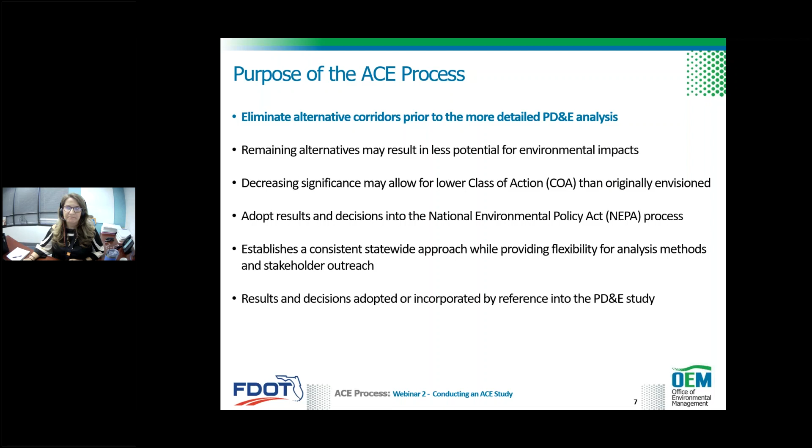So here's a graphic we presented in webinar 1, and we're going to go into a lot more detail into each of these steps. If you recall from a high-level perspective, the ACE process generally follows 3 main components: the initial analysis, conducting the actual ACE study, and documenting in the ACER.

So in webinar 1, we highlighted the different scenarios, and really the difference depends on how much information you have. In scenario 1, you have no information, and you might be using the ACE process to develop the study area and refine it. In scenario 2, you probably have information on your study area and you're using the process to identify and refine your corridors. And finally, in scenario 3, that's when you have the most information. You might have conducted a feasibility study, already have initial corridors identified, and use it to refine the corridors as well as eliminate.

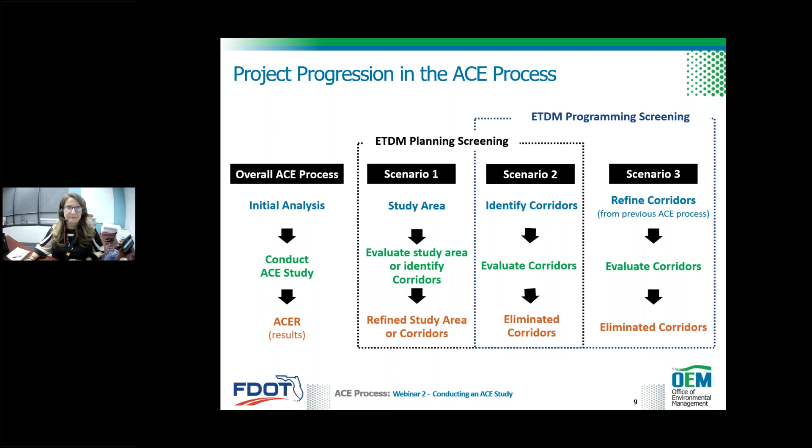Let's get into the initial steps before conducting the ACE study. At this point, you should know that you're going to conduct an ACE study. Before starting, you'll perform initial analysis to either define the study area or identify corridors which will be evaluated during the ACE study. You'll notice there's a lot of flexibility in the ACE process to use a best fit approach based on where you are in the process and what you know at the time.

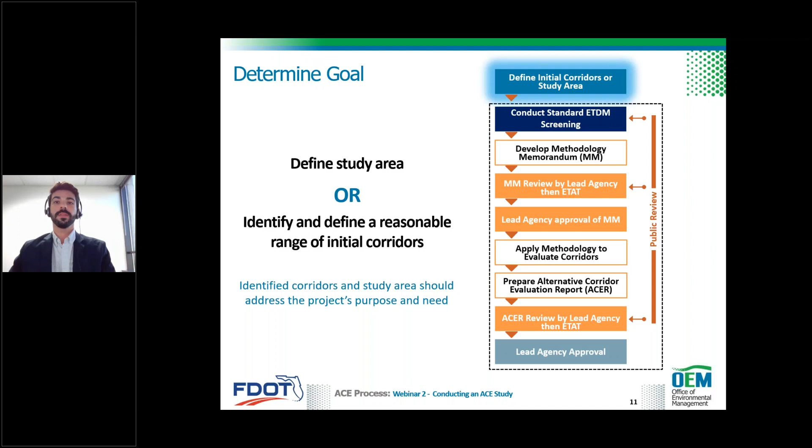I'm going to walk you through the key steps for this initial analysis. The very first step is figuring out whether you want to define the study area or identify corridors that address purpose and need. The next few slides provide guidance to help you select the approach for the initial analysis. Should we select a study area or should we get into identifying corridors?

You'll want to define a study area when you're conducting an ETDM planning screen and there's limited information on the project—perhaps the only information you have is from the MPO's long-range transportation plan. Another reason is it's a large study area, which has potential to be broken up into sub-areas for analysis. The West Bay Parkway project, listed at the bottom of your screen, included a study area analysis which assisted in refining the study area and identifying corridors for the ACE study.

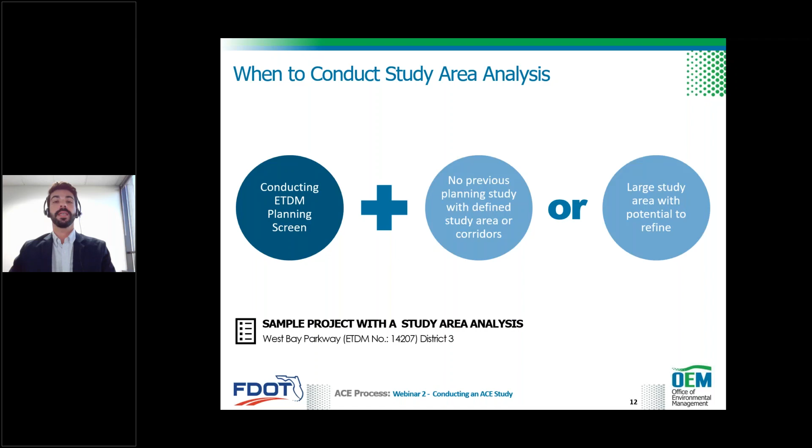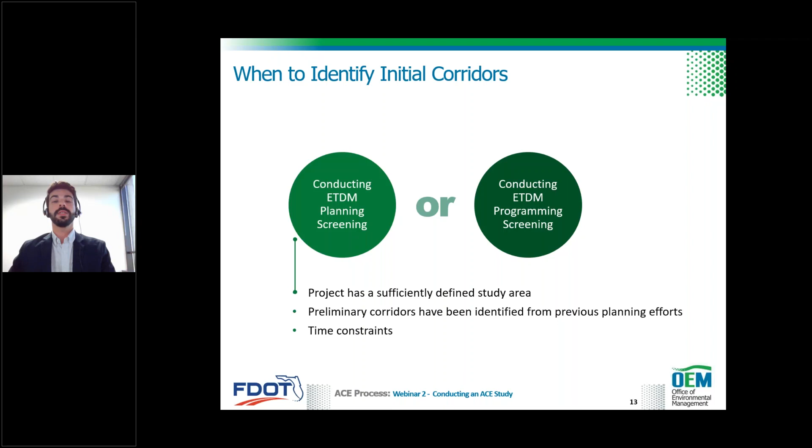You can also jump straight into identifying corridors during the ETDM planning screen stage. This could be an approach if the study area seems appropriate, or perhaps you already have preliminary corridors from a planning study or a master plan. And of course, if there's time constraints, whether from local governments or legislative mandates, then perhaps it makes sense to start identifying corridors. So technically, you have the option during the ETDM planning screen stage. However, during the ETDM programming screen, you need to begin identifying corridors for the ACE study.

Now that we've figured out what outcome we want from this initial analysis, let's dig in. Just like any project, you gather information. Some of this should have already been gathered when deciding to select an approach for the initial analysis. You use this information to begin defining some of the project parameters. As a starting point, there should be something from the MPO's long-range transportation plan or the strategic intermodal systems plan. If there's a planning study, that should also be considered.

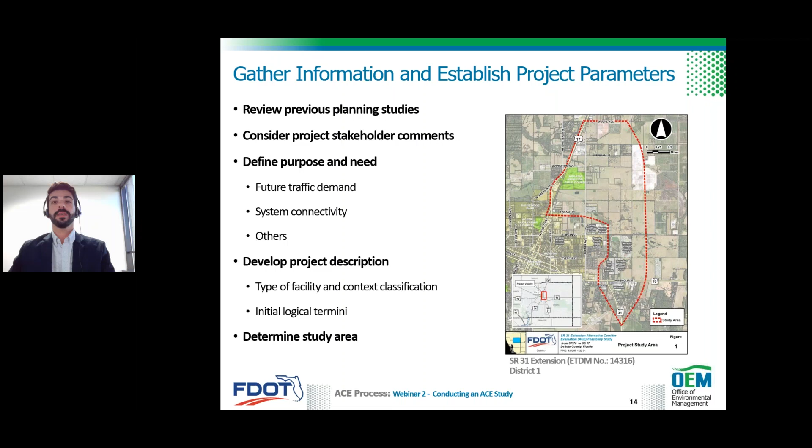So what's the purpose and need of the project? You need to describe this before defining the study area or identifying corridors. Is the purpose of the project to relieve traffic demand from a local community? Do you want to connect interstate systems and arterial roadways? What is the project—is it an expressway, an arterial, a bicycle and pedestrian corridor? Is it in an urban setting, a rural community, a natural area? And where will the project connect? Do you have a begin and end point?

If the intent is to identify corridors from the initial analysis, you first need to determine what type of corridor path or analysis. Swaths are the largest types of corridor paths—this is where a lot of ACE studies start out. Broad corridors are more defined; you'll have a clear idea of the typical section but keep it a little wider for future refinements. A narrower alignment is when you have a defined typical section—this could be the result from the ACE study and what you would want to take into the PD&E phase.

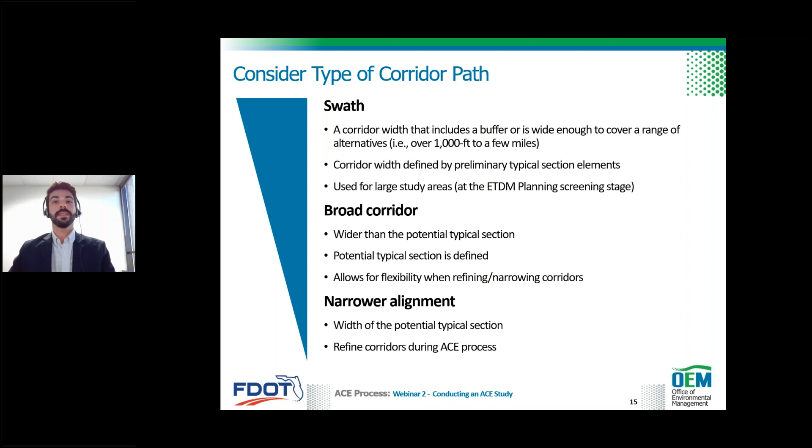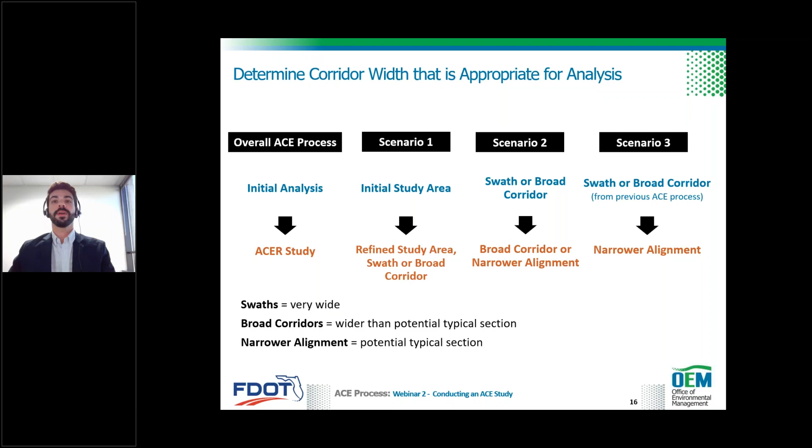Smaller widths may be appropriate in projects where there is a clear definition of potential impact areas to avoid. In other circumstances, you'd want to select a wider footprint, which provides flexibility when refining the corridors during the ACE study. Overall, when identifying corridor widths for analysis, it's recommended to select widths that are wide enough to allow the design of the alternatives to shift as needed to avoid potential impacts. Corridor widths can narrow as the study progresses, and they usually do.

As the ACE study is being developed and the typical section features are defined, the evaluation width of the alternative corridors can be narrowed to represent the potential typical section that could be used in the PD&E phase. During the initial analysis stage, you should also begin to identify basic design elements such as type of facility, context classification, and the potential design speed. These are needed to identify the horizontal curvature that you'll apply to the corridor paths, so that they have a realistic alignment.

Access points—at the very least, start with a beginning and ending access point for each corridor. Consider intermediate access points such as interchanges or intersections. And this is subjective, but identify a reasonable number of corridors.

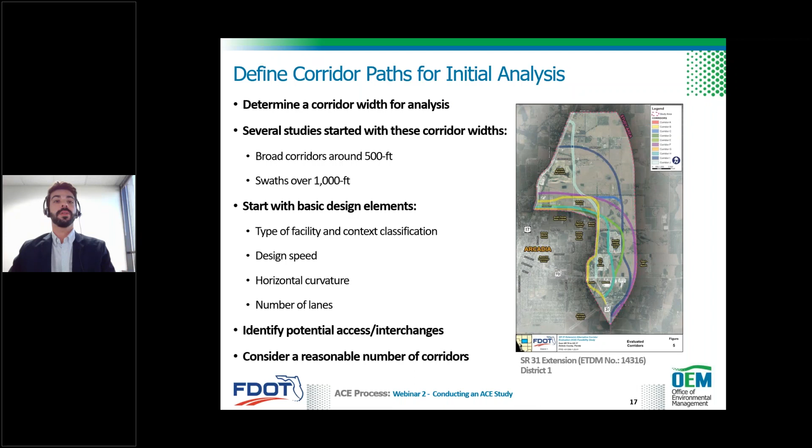Once you have the project parameters such as purpose and need, a general study area, and an idea of what the corridor paths and width will be used for the analysis, it's time to identify corridors or refine the study area. There are two primary activities that assist with defining a study area or corridors for the ACE study: one is assessing their ability to meet purpose and need, and two, the potential impacts to environmental resources.

For instance, corridors may be identified based on environmental resource mapping. Then you develop future traffic projections to check if they address purpose and need. This could also be accomplished in reverse order, where corridors are first identified based on their ability to meet purpose and need. Corridor refinements could occur, which prompt reanalysis. In addition to these primary measures, there's more that can and should be considered depending on the project and the study area.

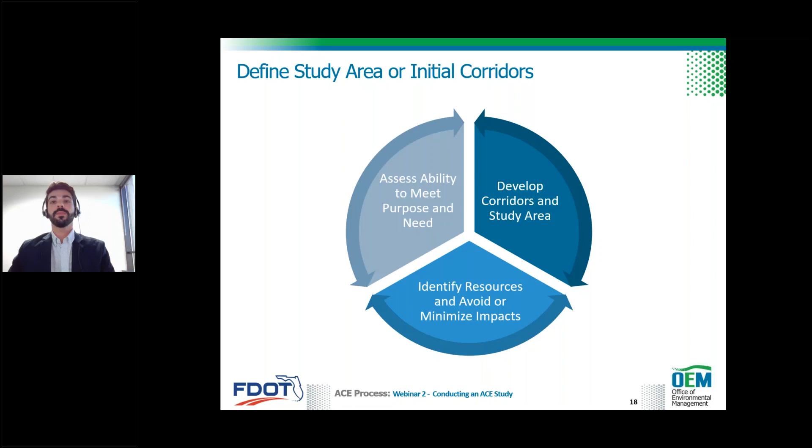Let's talk some more about the purpose and need. Most ACE studies are for new corridors, so the primary purpose and need goals are usually connectivity and improving traffic conditions. Evaluating a corridor's ability to meet purpose and need could be as simple as corridors connecting an economic employment area to residential communities, or it could be a more intense effort like developing future traffic projections.

Although, since traffic is usually a primary goal, we recommend initial and early traffic analysis to define and later refine alternative corridors. This is at a conceptual stage, so traffic analysis should match this level of information, which for most ACE studies is focused on future traffic projections.

Future traffic projections could be an iterative process where corridors are initially laid out, access points are conceptualized, future traffic demand is then forecasted and compared with other corridors. Refinements are made, and then traffic is rerun. At the end of this iterative process, a set of alternative corridors are identified that seem to address the purpose and need for the project.

This could also be used to eliminate corridors or even a study area before conducting the ACE study. If it doesn't meet purpose and need, then it should no longer be considered.

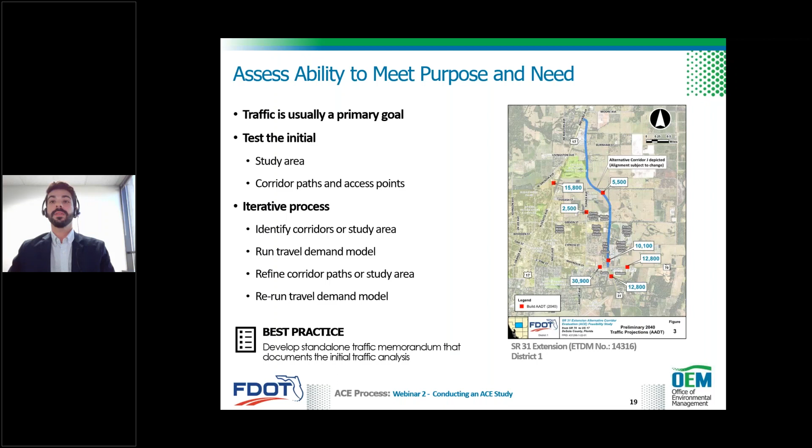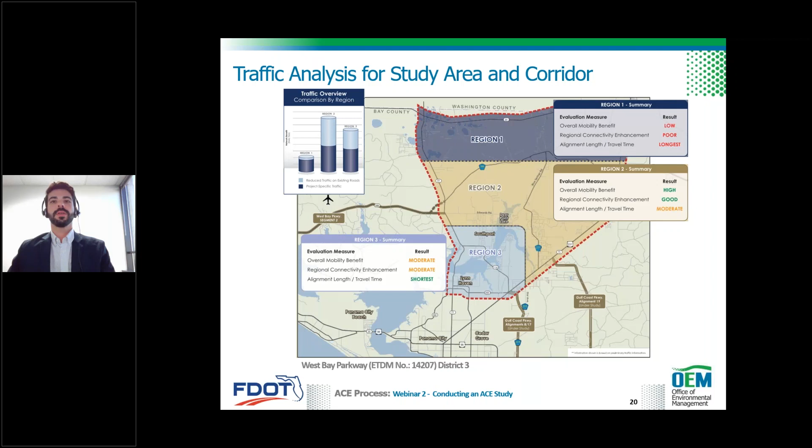Notice that at the top, region 1 resulted in low mobility benefits, poor regional connectivity, and the longest travel time. Region 1, which is that northern region on the map, did not address the purpose and need of the project. The initial analysis effectively eliminated this northern region prior to conducting the ACE study.

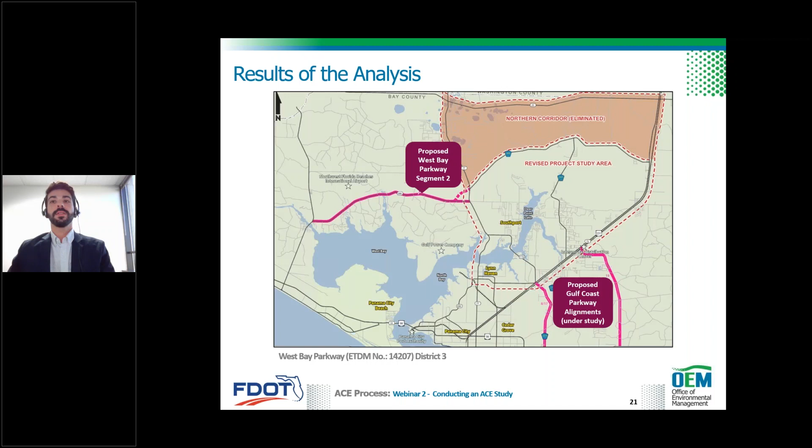The environmental evaluation for the initial analysis is largely based on desktop analysis. GIS is used to identify sensitive environmental resources, which assists in identifying corridor paths. Corridor paths are based on the selected corridor widths and designed using the preliminary design criteria, which we discussed earlier, such as the horizontal curvature. Corridor paths are laid out on a GIS-based map to avoid or minimize impacts to sensitive environmental features to the extent feasible, sometimes meandering from beginning to endpoint.

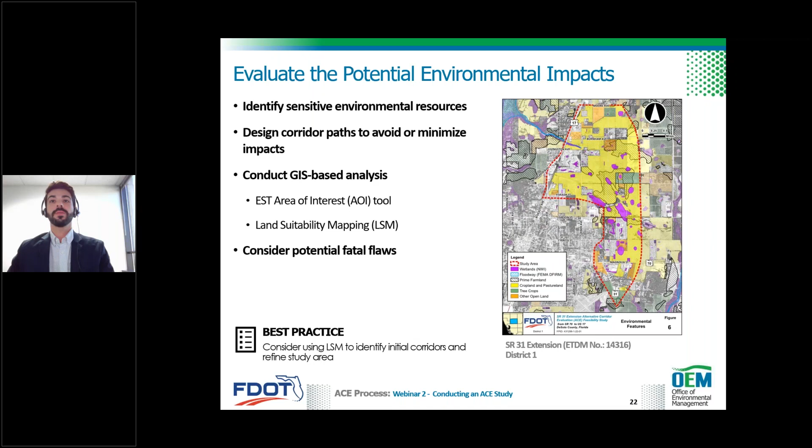One GIS analysis technique used by several ACE studies is land suitability mapping. It's a best practice to consider using this method. Another GIS tool is the ETDM Environmental Screening Tool's Area of Interest feature, which allows you to screen corridors without initiating an official ETDM screening event.

Land suitability mapping is a helpful tool to identify initial corridors during the initial analysis stage and could also be used during the ACE study. It is a GIS-based mapping approach that identifies areas that corridors should avoid or minimize impacts. This technique utilizes existing GIS databases to identify environmental features within a study area, such as social, cultural, natural, and physical features. This could include parks, wetlands, endangered species, cultural resources, and community centers.

The environmental features are combined in a GIS map. Levels of shading on the map are based on the cumulative number of environmental features in the area. Land suitability mapping uses progressively darker shades to indicate the least desirable paths for the placement of corridors, as shown on the map on your screen. These darker shades could be avoidance features.

There could be instances where features that are alone seem significant enough to be an avoidance area. For instance, maybe a national or state park could be an avoidance area. Avoidance features may be identified using ETAT commentary, stakeholder outreach, and the district's knowledge of the area.

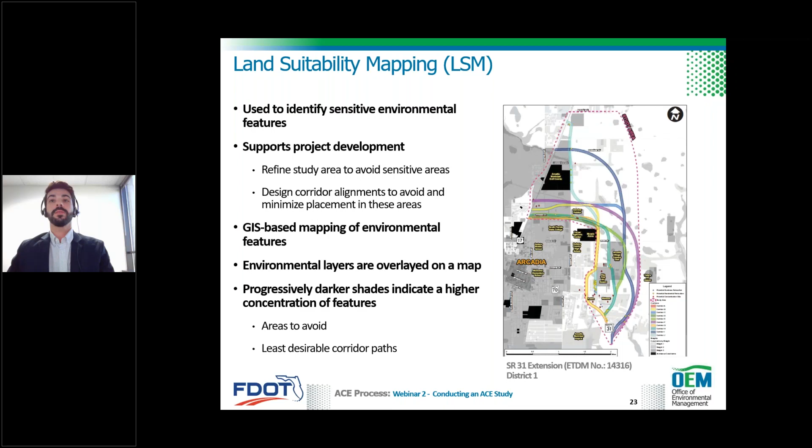Once fully mapped, corridors are developed within the lighter and non-colored areas of the map to the extent feasible, as these areas represent locations that minimize impacts to the greatest extent practical.

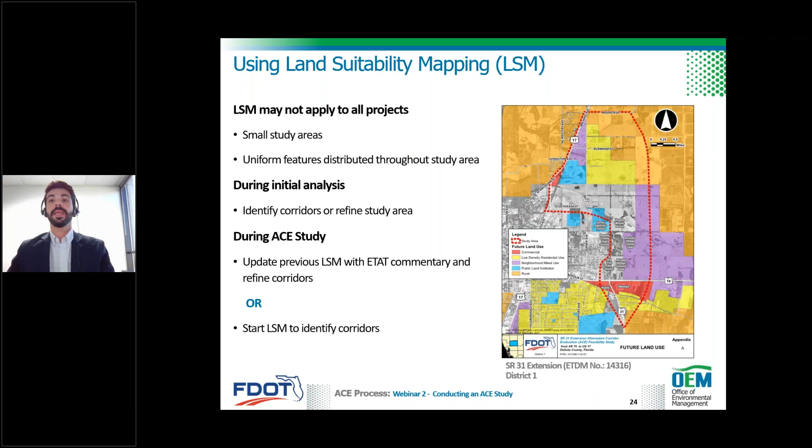There could be instances where you have a large study area and start with general alignments that have several variations of links, which when combined create a high number of corridors. This could be an opportunity to narrow down the number of links, but still maintain the general alignments. In these situations, a high-level qualitative analysis could assist with narrowing down the links for the ACE study.

It may be ideal to create sub-areas or segments of analysis, grouping corridor paths that are similar. Evaluate the individual links and their potential environmental impacts. Compare and check which ones are significant to eliminate those links.

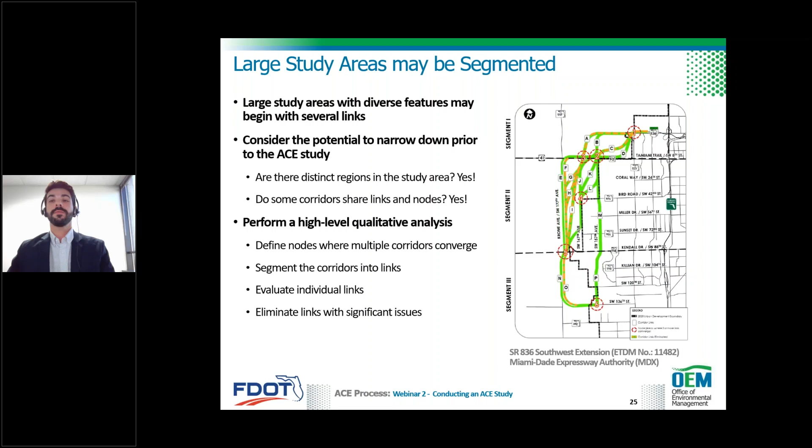The State Road 836 Southwest Extension project performed this initial analysis prior to the ACE study. The project started with 3 general alignments, but several interchangeable links, which could create up to 46 possible corridor combinations. Several of these corridors share the same access points and similar links.

To better understand the sensitivity of environmental resources, data was collected and input was received from agencies, the public, and environmental organizations. The individual links were then screened, and the analysis showed links with disproportional impacts to environmentally sensitive lands, projects such as the Comprehensive Everglades Restoration Plan, or CERP, wetland mitigation lands, and habitat fragmentation.

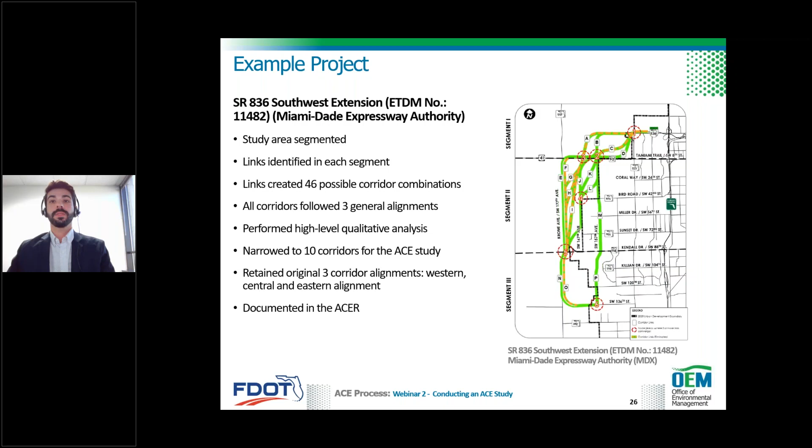The result of this high-level analysis eliminated 7 links due to unavoidable impacts. This resulted in 10 corridors for the ACE study, and the 3 general alignments were maintained. The initial analysis was documented in the Alternative Corridor Evaluation Report.

The naming convention that you begin with during the initial analysis should be preserved in the ACE study and even the PD&E study. Therefore, if you have corridors A, B, and C in the initial analysis and eliminate corridor B, in the ACE study you'll evaluate corridors A and C. This should be explained in the ETDM screening event and methodology memorandum of the ACE study.

Multimodal features should also be considered. In an urban area, transit corridors could be evaluated as part of the initial analysis. There could also be rail corridors to consider, and even shared use paths or trails, such as the Sun Trail network. After the initial analysis is performed, this could be a decision point to continue the ACE study.

If there are significant fatal flaws, then perhaps a project needs to be developed further prior to the ACE study.

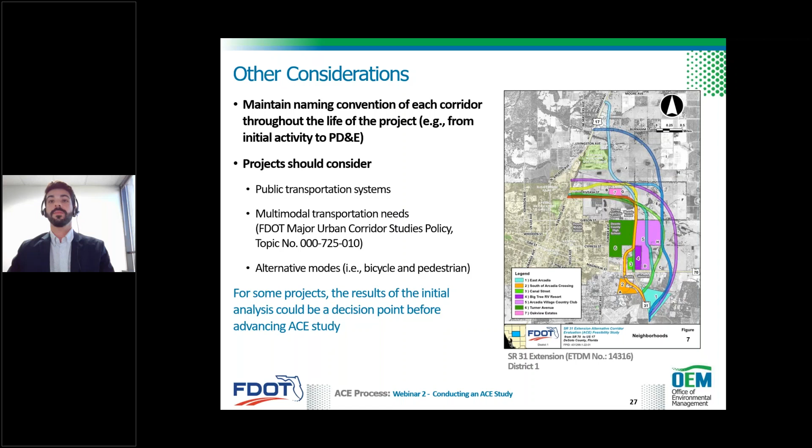Now that you have the study area or the initial corridors, it's time to screen them. Prepare a standard ETDM screening event, whether a planning screen or a programming screen. As part of the development of this webinar, we interviewed several ETAT members to get their feedback.

One approach that was well received was to conduct a kickoff webinar with the ETAT team prior to the ETDM screening event. Since ACE studies are usually complex projects with multiple corridors and large study areas, this kickoff webinar helps to create an understanding of the project and corridors, and it helps ETAT members with their review.

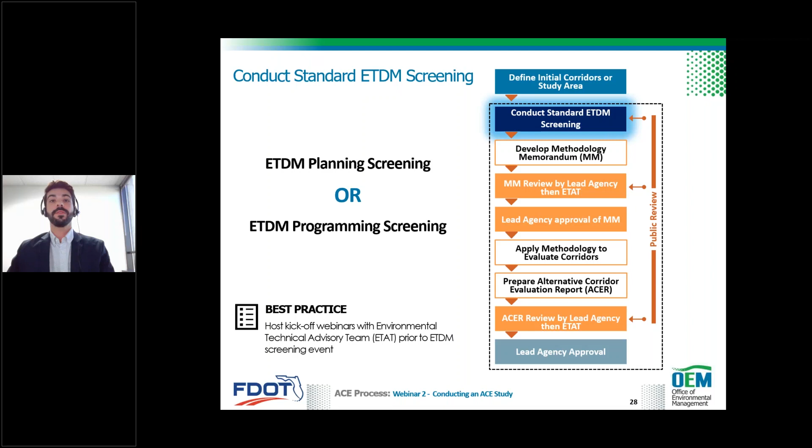The screening is going to include the standard information about the project, purpose and need, study area, the corridors, and a preliminary environmental discussion. The project description should mention that the ACE process will be conducted. When this information is ready, the project can be screened.

OEM performs a pre-screening of the project. During the screening, ETAT members are going to provide their input on each relevant environmental resource in the study area and the potential impacts by each corridor.

The ETDM screening event is then documented in a preliminary screening summary report. The information from this report is used in the next steps of the ACE process by helping to identify sensitive environmental resources and create the analysis approach for the study.

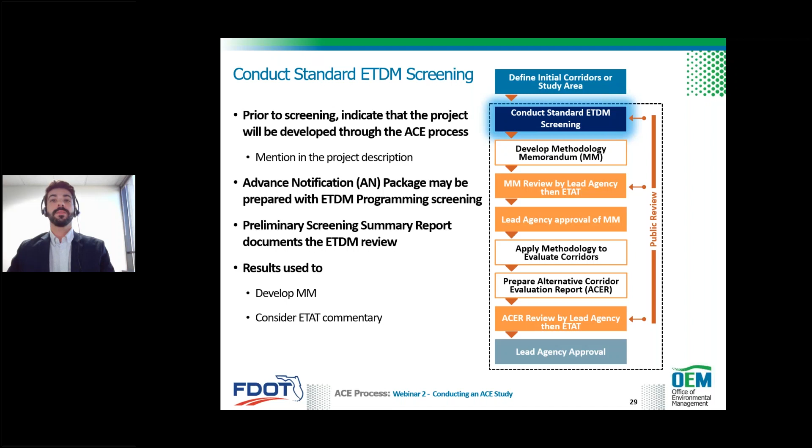After the preliminary screening summary report, the next step is to develop the methodology memorandum. But before we get into that, keep in mind that the ACE process is embedded within the ETDM process.

After the preliminary screening summary report, the ETDM is revisited with 2 ACE deliverables. One is the methodology memorandum, and 2 is the alternative corridor evaluation report, or ACER. The final ETDM summary report is published after approval of the ACER.

A best practice that we've found while performing our research was to consult with OEM when there are issue resolutions prior to the methodology memorandum. This discussion could help shape the analysis approach within the methodology memorandum.

Another best practice is to conduct field reviews and invite ETAT members. If they can't make it, then consider a virtual field review, where the project team performs the actual field review, taking geolocated images or video and sharing with the ETAT members. This could help refine the extent and magnitude of the environmental features identified from GIS.

As mentioned earlier, we performed interviews with districts and ETAT members and reviewed several ACE studies to prepare this webinar. We found some best practices that you'll notice throughout the webinar.

Identifying corridors and refining corridor paths could be accomplished by land suitability mapping, which has been used for several ACE studies. Since traffic is a primary purpose and need topic, consider developing future traffic projections to test the corridors, and for some projects, it could be used to test the study area.

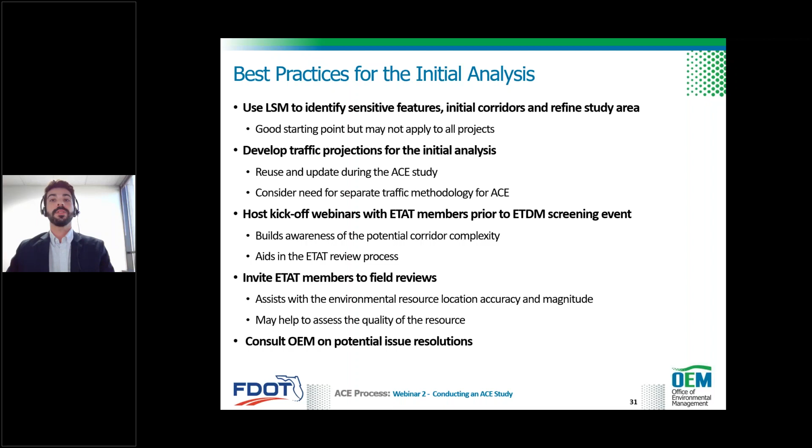Okay, so now let's take a few moments for questions before we begin lesson 2.